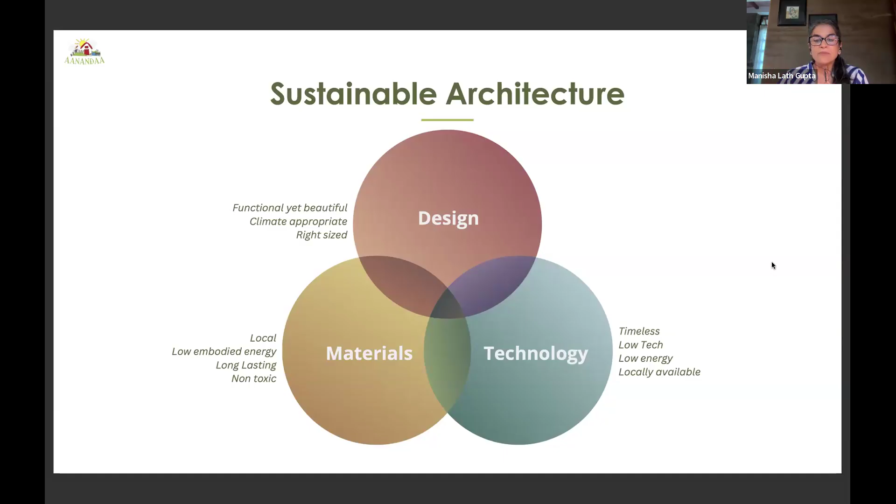The second thing is materials. We want to use as much local material as possible with low embodied energy, which have a long life and are non-toxic. And then technology was really the big debate. Okay, what kind of technology should we use? Even when you talk about earth architecture, there are many, many options. And we needed to figure out which one we wanted to go with. So let me talk you through each one of these in a little bit more detail.

Let's talk about the sustainable design piece of the puzzle. The important thing is really to design a house which is very appropriately sized. And in our case, we were very lucky that we had spent many years in Mumbai. And as many of you in Mumbai know, the house size is very small. So we never had this craze of building something so huge. And in fact, even after we started the project, I shaved off 500 or 600 square feet from the house design, even when we had begun construction at one end.

Because every place I used to ask the architect, "Bhai, yaha, who will clean up this place? Yaha, who will do the mopping, who will do the sweeping, and who will keep this place cool or hot?" So please think of the spaces as easy to cool, easy to heat, and easy to maintain. And don't get caught up with the impact of it.

And the other thing was, suppose you want to build for multiple people, there is always a way for you to have rooms which can be used for multiple functions. So while this house has 3 bedrooms, it can actually still host maybe 20 people, because many of our other spaces can double up as guest spaces if you just put mattresses on the floor.

They will still have privacy, they'll still have a room, they'll still have a bathroom they can use, because we have doubled them up for other uses.

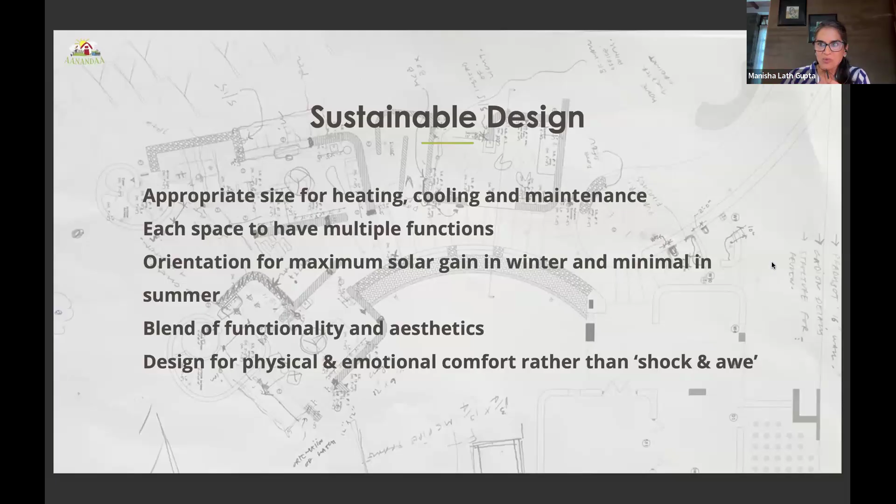So we were very clear, we live in a village anyways. We actually want a house which does not shock and awe. We want a house which nobody can see, which should be hidden, and it should look very modest. And that was really part of the brief that we gave to Jitesh.

The second question was what materials to use. So I was keen to use earth, because that's really the material that all of us who think of building sustainably use. So we wanted to use earth. We wanted to use materials which have low embodied energy, can be found locally, and they can assimilate back into the ground if this house is ever broken down after however many years of it being around. So that's how we looked at each and every material that we used.

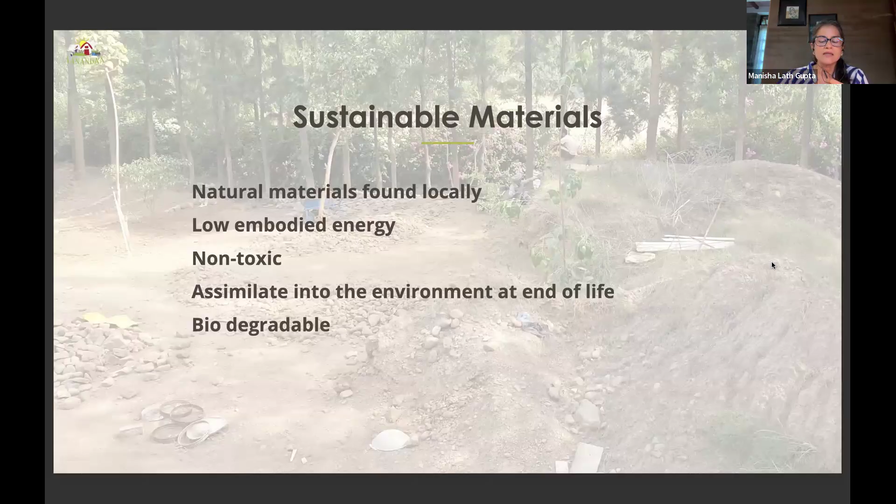And eventually we chose earth, lime, and stone. And I'll just talk a little bit more in detail about why we chose those 3 materials, and where we sourced them from. And the last thing was on technology.

Wherever possible, I was keen to use some very low level technology, because when you live in a village, you're always worried about maintenance or repairs or anything that you need to get done later. And if things are built simply, then simple people can repair them. But if they are built very fancily, then you need very fancy people to come and repair them. And that may not be possible in a village setting.

So ancient wisdom over modern science was our choice. Minimal repair or maintenance, whatever takes that, we will go with it. And managed by low skilled workers or even by ourselves. That was really our ask.

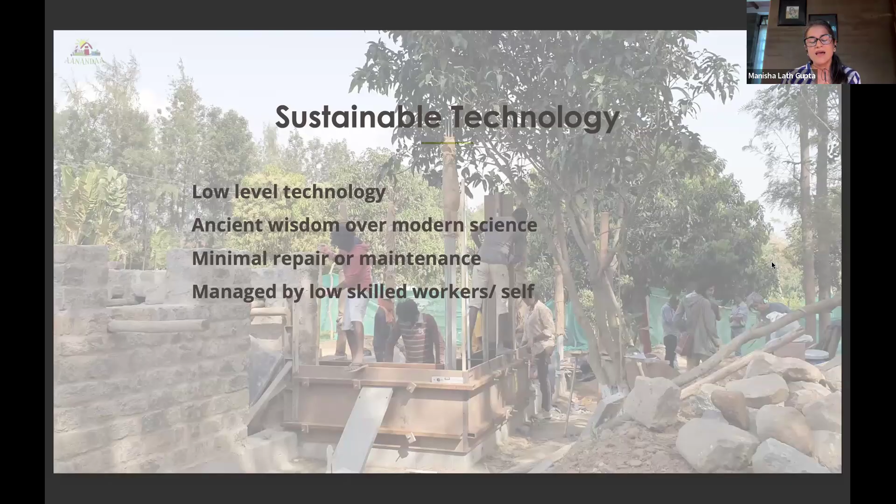So I had actually no idea about rammed earth. I had never heard of the concept before. I had seen a lot of daub and wattle. I had seen a lot of cob. I had never seen rammed earth. And Jitesh said, let's make the house in rammed earth, because it will look contemporary. It will look modern, and it does not have that rustic vernacular feel that some of the other technologies end up having.

Now, yes, I had the same thought that many of you have when you first look at rammed earth, and that was what happens when it rains? Won't it all just dissolve and disappear? So that was my reaction as well. But then I researched it, looked it up, and realized that it is a very commonly used material.

It has been used in the Great Wall of China. It has been used in Leh Ladakh quite a bit. Some of the buildings which withstood the Nepal earthquake were all made in rammed earth. It's a common material that's also used in some parts of the US, especially Santa Fe, I think quite commonly used there.

And the way rammed earth works is that because it's a thick wall made of earth, it is very good thermal mass. This basically means that if it acts as a partition, and there is cold air on one side and hot air on the other, the two sides will try to equalize the temperature. But because this is such good thermal mass, it will take a long time for this to equalize.

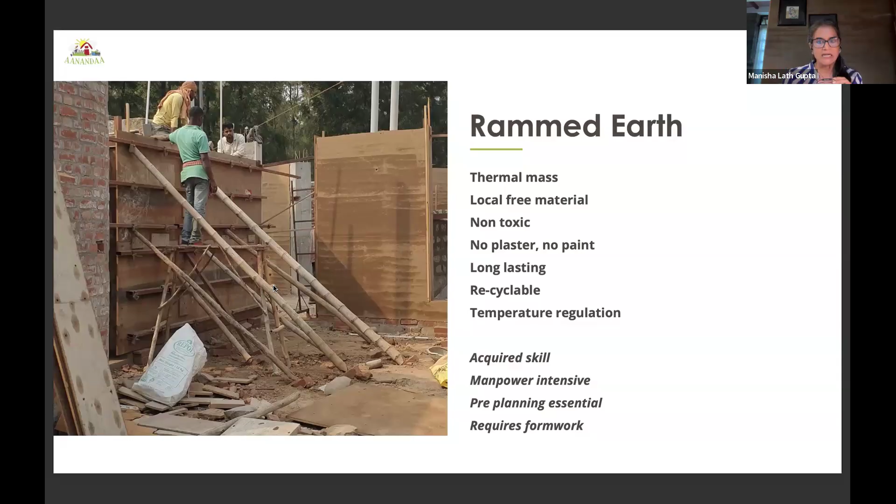The second material that we used was stone. And the reason being that we actually have a lot of stone in the village and around us. We are in the middle of a mining kind of an area, and there is a lot of legal mining which happens here, of course, some illegal as well. And stone is a readily available material and also good thermal mass, just like earth, and a lot of good local craftsmanship. So we were very keen to give as much employment to the local village as possible. And this was a good addition to our palette.

And in fact, Jitesh felt very happy adding stone because it gave relief from the heavy brown color of the rammed earth and gave a nice contrast. And also some walls which were slightly curved, which were not absolutely straight and therefore could not be rammed, we picked all those up in stone. So when you see the final house, you see that it's a really good combination of the two.

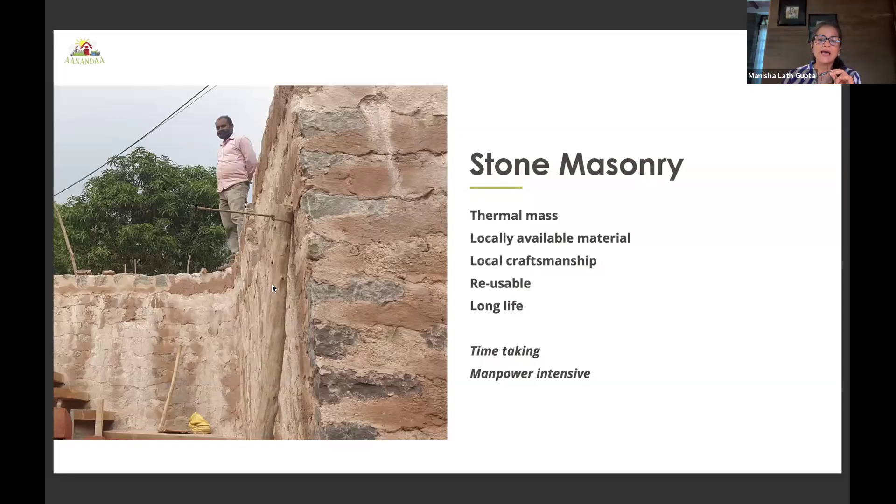And the third material really was lime. We wanted to use lime because one of the very good properties of lime is that it is a natural termite resistant material. And I was very loath to do a very toxic termite treatment in the foundation of the house because remember, for us the habitat is really important. It's something we'd spent 12 years of our life building. We didn't want to contaminate it or poison it in any way because it's not just us who live here. There are so many other species who live here as well. So that was a very big attraction. And of course, it's a natural material, it's recyclable, it's non-toxic, it's supposed to be long lasting. So that's the reason we chose lime in a lot of places.

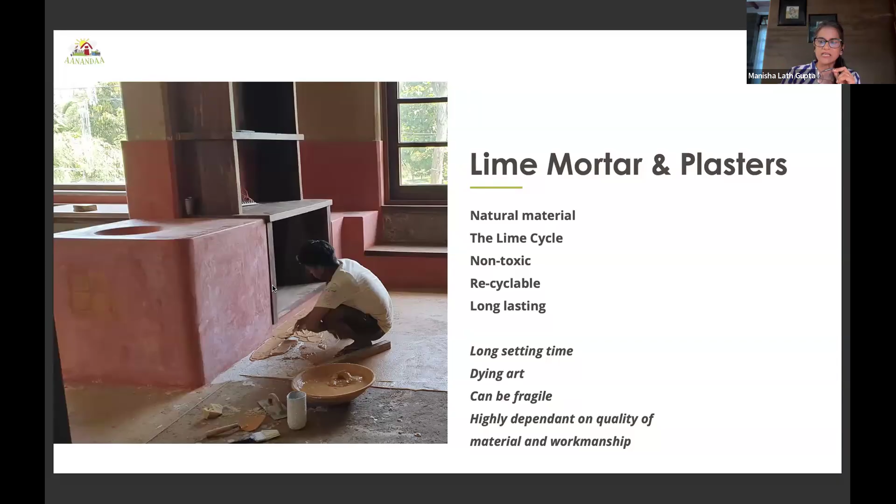And the downside really is that it takes a long setting time and you have to be careful about it, and you can't do some of the things that we've got used to doing now in our homes, like dragging beds and dragging heavy furniture, because it can be fragile. And it's highly dependent on the quality of both material and workmanship. And as you know, both of them are hard to find. And so this is where we took help from Malvika Mehta of M-Line, and we learned a lot from them. But I'll talk a little bit more about that as we move ahead.

Okay, so the walls and the floors were settled. Really, the discussion came to what should we do for roofing. And the problem with concrete roofs is that they become very hot and we don't have any air conditioning. So we had to really think through how to create a roof which will not heat up the house.

So concrete slabs, as you know, are the standard roof of choice these days, which is what most people use. It's a very hot mix of stone, cement, and steel, all of which heats up under the hot sun. And a lot of times, if you see old houses, the reason they have to be rebuilt is because the roof has caved in. It's not as if the walls have broken or the floor has broken.

No, it's always the roof, because the steel mesh that is put inside these slabs tends to rust over time. And once it starts rusting, it can't support the weight anymore. And then what do you do with this concrete? You have to go and junk it somewhere, because the mix is non-recyclable. Once it's mixed up and set, it's just that. So we didn't want to really go ahead with a concrete roof.

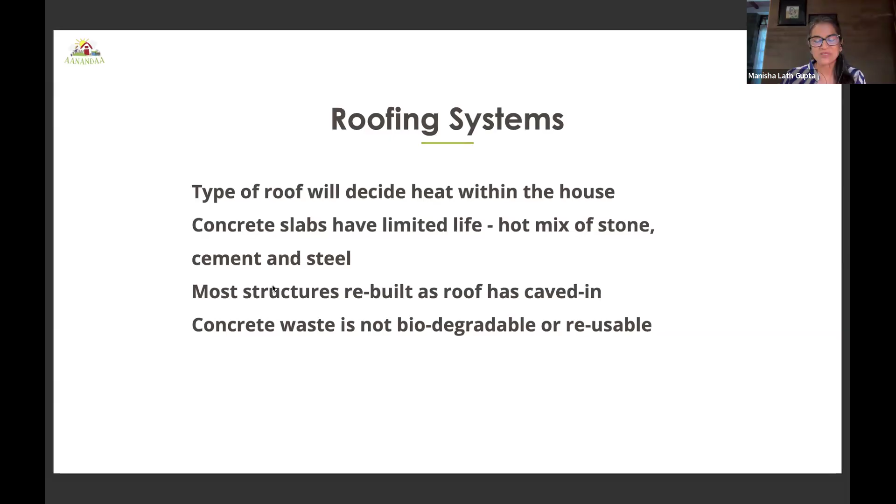That will give us an idea of the pros and cons of each one, and we can also share with other people. And a lot of these risks I wanted to take, because I was like, listen, if I take the risks, maybe somebody else will also be willing to take these risks. So we decided to actually go with all different types of roofing systems in different places.

And they ranged from shallow domes, which you can see here in the drone shot, built purely from brick and cement. It has no steel and it has no shuttering. And these gentlemen that you can see standing around the dome are from the Rohtak Dome family. They're very well known. You can find them on Google as well. And it's just amazing how they make these roofs. And this is traditional technology we have in our country, which for some reason we have chosen not to follow up with.

And then the kitchen roof was one of the first roofs we built, and we had just started the house. We had to place the water tank. And so we were already a little confused as to which roof can take the load of the water tank. And we started thinking, oh my God, will we have to put a concrete roof right at the beginning of the project? Because that would really defeat the whole idea of trying to build a little more sustainably.

And so we settled for the filler slab, which, as you know, is a relatively more popular technique of putting some earthen pots in the roof and thereby reducing your concrete consumption. And in fact, I've noticed that it also keeps the roof much cooler, because wherever there is a pot, it doesn't heat up that much. So I have a temperature gun. I go around measuring all surfaces in the summer, and that's how I know which roof is working how.

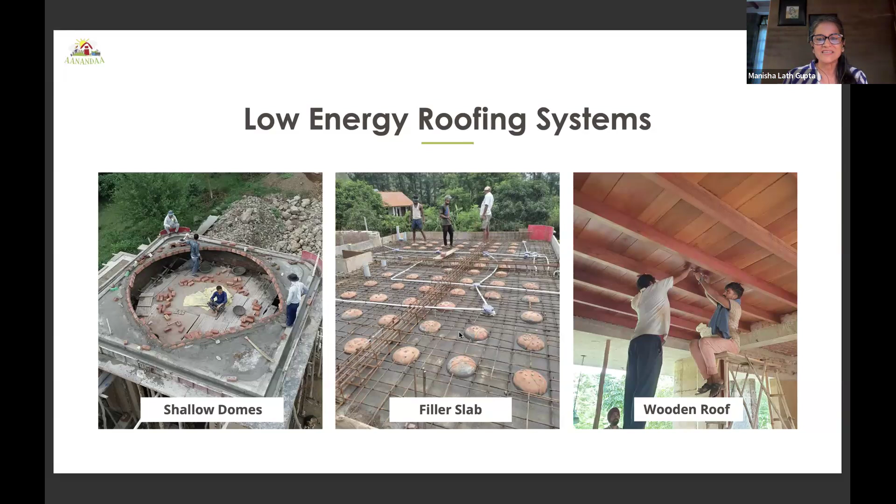So those are the 3 roofs, and we added a few more, which you will find details of on my YouTube channel. But here is a nice picture of a shallow dome under construction. This dome actually has a riser of only about 9 to 10 inches, so you can easily put another floor on top of it. And it has no steel, no shuttering. The minute these guys make it, people start standing on these roofs, and they can take the weight. And don't ask us how it works, but it's pure magic and it works pretty well.

So it's very affordable, very cheap, and very quick to make. In a room size of about 12 to 16 feet, it would take them 2 days to make this roof. So really, really good craftsmanship. And I think everybody can choose to integrate roofs like this into their projects.

Now let's come to finishing materials. Lately I've been thinking about how toxic and inflammable finishing materials used these days by interior decorators and homeowners are, because whenever there's a fire, and unfortunately this summer's been so hot, and we've seen some horrible fires happen in India, some in Delhi, and some other places as well. And a lot of times people are dying not because they got burnt, but they just got asphyxiated because the nature of the poisonous gases emerging from this fire was just unbearable for them.

And this is all coming from the highly toxic and highly inflammable finishing materials that are being used by interior decorators within our homes. As a homeowner, and of course as a designer and an architect, I would really urge everybody to look at the materials very, very carefully before they are integrated into a living space. Because at the end of it, we all have to live in a non-toxic environment. That's the whole charm of having a sustainable house.

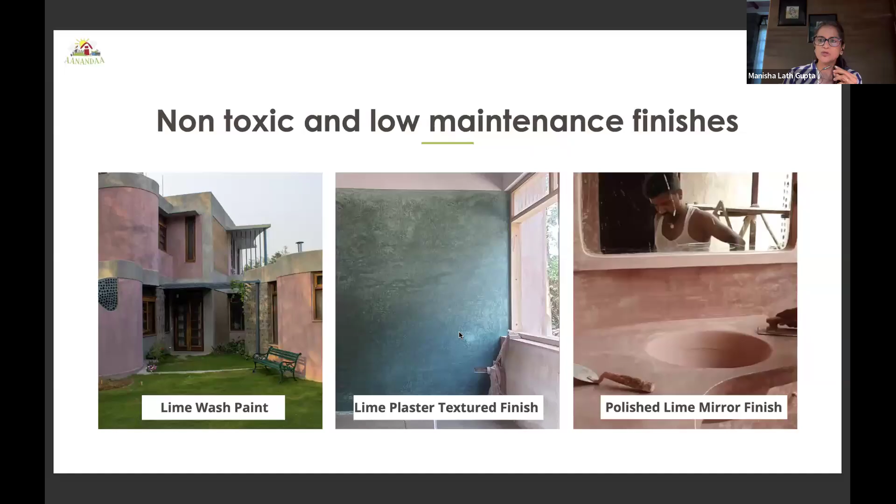And then in the bathrooms, we've used polished lime, which is a mirror finish kind of experience. This again has a classic, everlasting kind of feel to it. And we've avoided the use of tiles and things like that in our bathing spaces. This is a nice photograph of the bathroom. And then the outdoor shower that's been thrown in here, because what's the point of living on a farm if you cannot have an open to sky shower in the warm summers?

All right, let's talk about water, guys. It's the most important thing, something that we literally run our entire house and life on.

And I was very clear that we want to harvest all the water that's falling on our rooftop, and I want the house to run on rainwater. So a simple calculation told me that I receive 150,000 liters of rainwater on my rooftop. And those of you looking for this quick calculation and how do you arrive at it? Well, the formula is take the roof of your house in square meters, multiplied by the average annual rainfall in millimeters, and you will get the volume of water in liters.

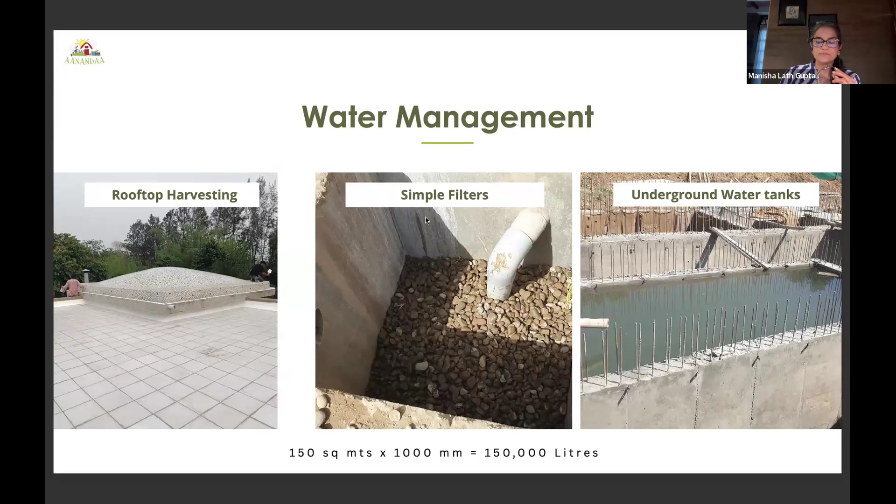In terms of waste management, all the wastewater from our house, all the gray water, so showers, kitchen, wash basins, they all go into the garden. So all this water is managed in small beds outside the house and very close to each of the outlets. So we are not aggregating this water, we are keeping it separate and just putting them into very biologically rich

and active pits. Usually around these pits, we have either papayas growing or bananas growing, lemongrass growing, and all the water that comes out of our wash basins and our showers comes out here, including washing machine, by the way. And we have just shifted to using cleaners which are non-toxic. It's just a simple thing we could do. And today there are so many artisanal brands. They're doing such good work, and we just buy our products from them and use that.

And so we've realized what's not good for our garden is not good for us. So we don't want to use any product which is harmful for the soil life. And in that process, we ourselves have become much healthier as well. And where black water is concerned, which is basically human poop, we've installed a biodigester. So that green box you see here is a biodigester bedded into the ground.

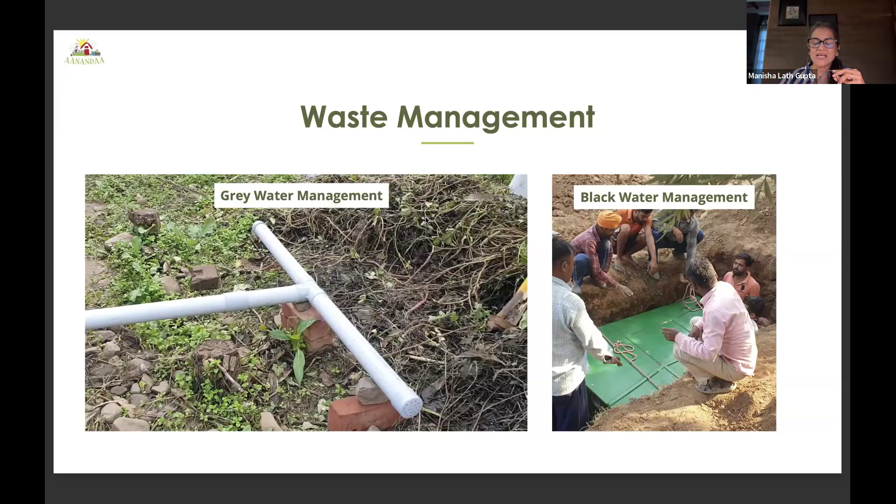All the waste from our toilets comes into this biodigester, and this biodigester has anaerobic bacteria in it, which feasts on human waste. So as it breaks down the human waste, it releases a small stream of liquid, which we channelize back into our garden through a soak pit. So very simple, all the waste is managed in our garden itself. And yeah, I mean, it really keeps our moral compass absolutely straight. We know exactly what to use and what not to use, seeing that the water goes straight into our gardens.

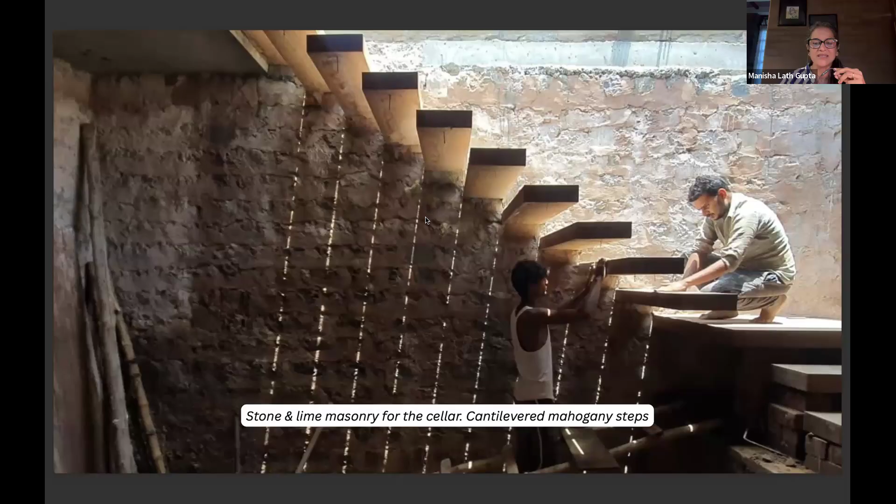Okay, this visual is of our cellar, and this is while it was still under construction and we didn't have a roof, and you can see the beautiful light coming in through. But let me just talk a little bit about the cellar here. So a cellar is basically a place which is underground. And what we've done here is we've just dug like a basement and built a space which has very thick walls, almost 4 feet wide at the bottom and about 3 feet wide at the top. These are made of stone and lime.

And this is the place where we store all our food. So we need a cellar because we grow food. We grow a lot of food. You may not need one. But if you do decide to build one, just make sure that you are in a very well draining place, because if there's a lot of water accumulating around your cellar, you will have problems of dampness and also some seepage.

So our soil type itself is sandy. Our house is on an elevation. Water does not gather here. It leaves the surroundings pretty fast. And all those reasons prompted us and made it suitable for us to create a cellar. It may not be in your case. So I would urge you to not just follow this blindly, but see if it works for you or not.

Now, there are three things that are important in a cellar. You have to keep the air circulating, you have to maintain a temperature, and you have to maintain a certain amount of humidity. So the air circulating is done by simple exhaust fans, which run 24/7. They don't take up too much energy, and they basically draw fresh air coming in from the outside into the cellar.

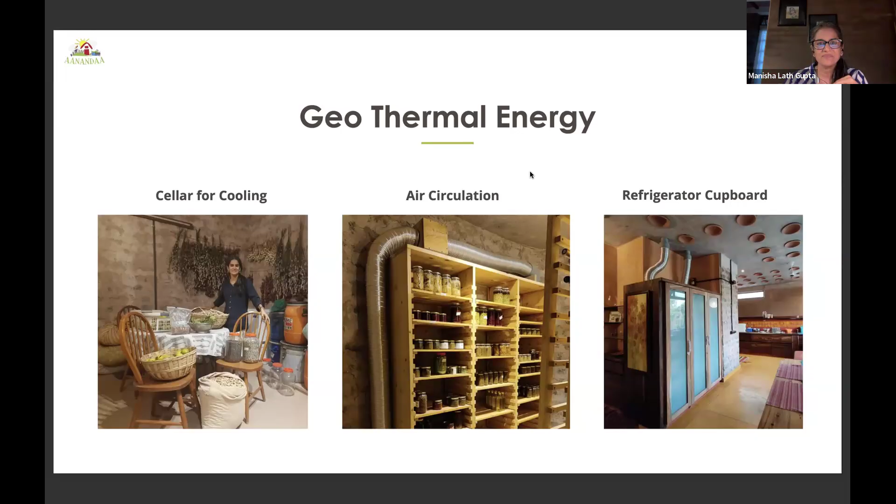Wherever possible, we've used very simple energy systems. I think maybe because this house was made by a woman and not a man, there isn't that much masculinity built into it. So there is no fancy tech and high energy. We have simple solar panels. We have a 10 kilowatt plant on our rooftop, and our house runs on that. And in fact, we consume much less than that. We give some surplus to the government.

Whenever we find that the heat is streaming in from some window and heating up our house, we plant a tree outside it. And I have used this frangipani tree as a tree of choice in some places because it is deciduous. It drops its leaves in the winter, allowing the sun to come in. And it stays green in the summer, blocking the heat. Not to mention the beautiful flowers on it, which are very sweet smelling, and you get a free, non-toxic room freshener effect as well, right?

And then for winters, we heat up our rooms with a simple fire stove. And because we've planted so many trees and we have so much spare firewood all around us, this again comes at a very low cost to us. The ash, by the way, from here is very useful for our plants, and it finds its way back into our flower beds.

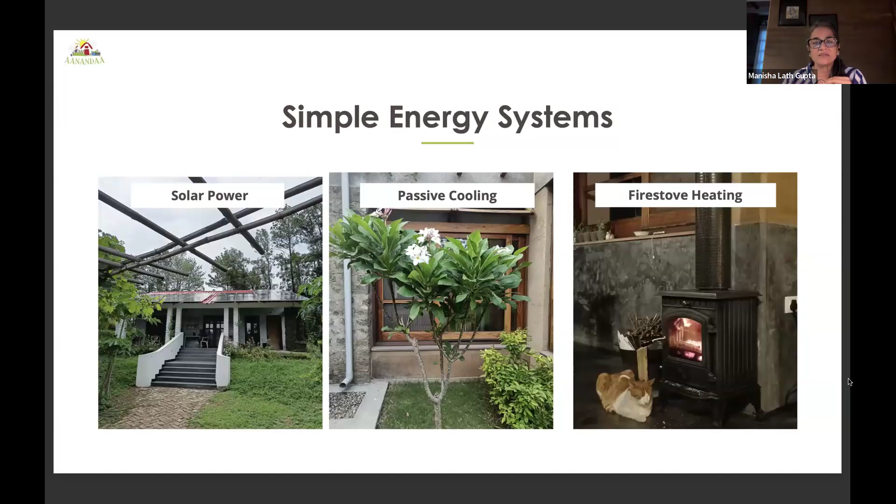A simple thing that each one of us can do is use salvaged and secondhand furniture. In fact, sometimes it amazes me how people build a new house and they change everything in it, no memories, no old furniture, no nothing. But I love old things, and I've tried to not only hold on to my old things, but also a friend's old furniture.

So we've spent money on labor to fix them, but that's always been something of choice, that if we have to spend money somewhere, we will spend it on people, put it into pockets of artisans and masons rather than into the pockets of corporations.

Okay, low-tech fixtures. Again, I've already showed you some of these pictures, but wherever possible, we even made our own light fittings because I wanted fittings which have replaceable bulbs. And unfortunately, a lot of the light fittings that we get these days are these Chinese fittings, which when they stop working, you have to trash the whole fitting altogether.

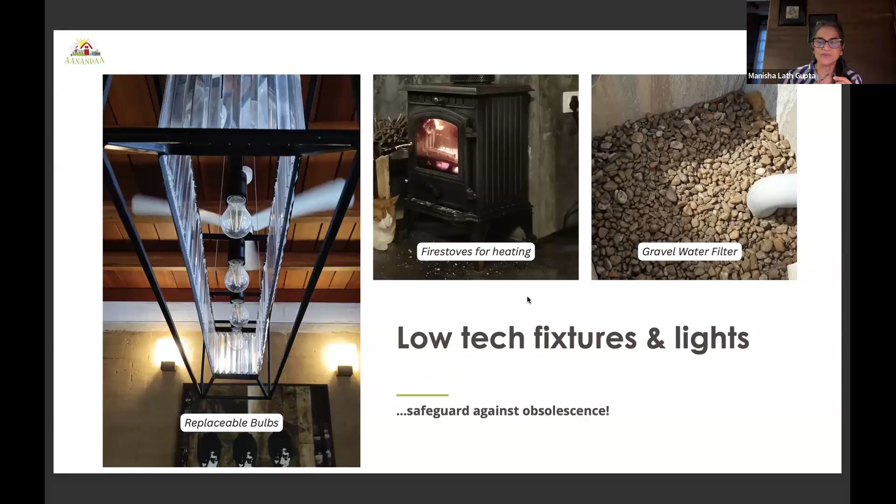But we had a lot of little leftover wood from the woodwork, and we used those pieces to make these light fittings, which were actually designed by our architect. And this worked really well for us. And you've already seen the fire stoves and the gravel water filter, which are again very low-tech fixtures, and they help guard against obsolescence.

Okay, one of the other principles that we try to follow was produce no waste. And I had a deal with Jitesh that we will not break anything that we've already made. So if it is wrong, too bad. It should have been supervised better, or the plans should have been better. So we've not broken anything we already built.

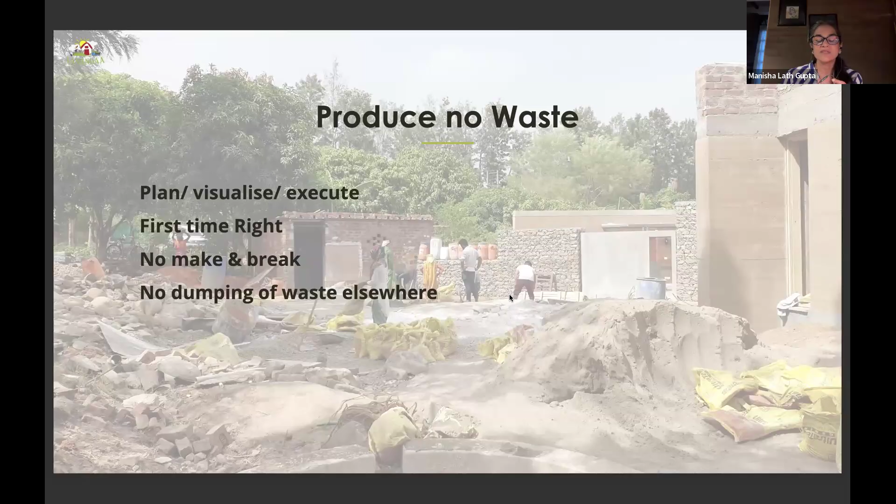We've tried to get as many things first time right, and we did not want to dump our waste from our construction anywhere else. So what we did was, at the end of our construction, you can see this construction site. It was filled with all sorts of waste. And we built this retaining wall, which you can see in the backdrop, and picked up all the waste and chucked it behind it. And that raised the level of that area. And then finally, we planted trees on top of it and settled it all.

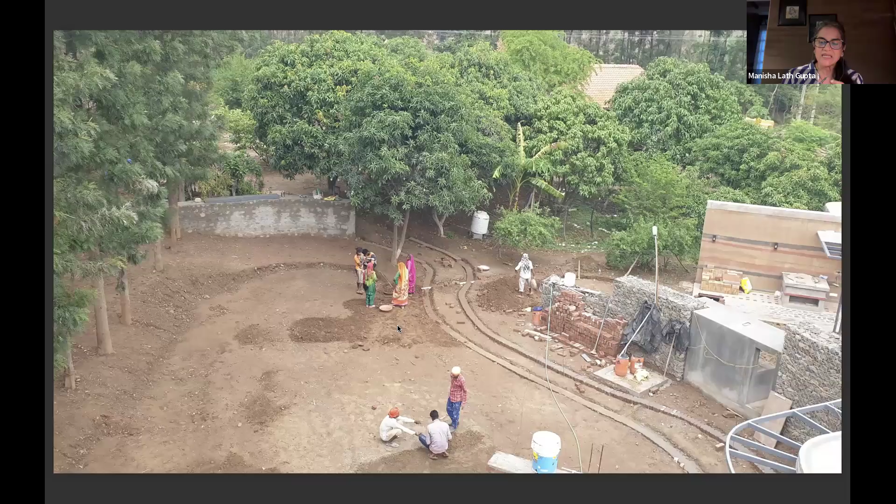So we've buried all our waste right here on site. But we were very careful of not going and polluting somebody else's land and dumping waste anywhere else. And that should really be an integral part, I think, of our construction ethics if we are trying to build sustainably.

This is another example of how we've reused something. Right at the beginning of the project, I was told that we'll have to build a slaking tank, a lime slaking tank, a tank in which we will put the lime and hydrate it so that we can use it. And I was like, boss, you can make any tank you want, but we're not going to break anything. So just make sure that that tank has a life at the end of its utility.

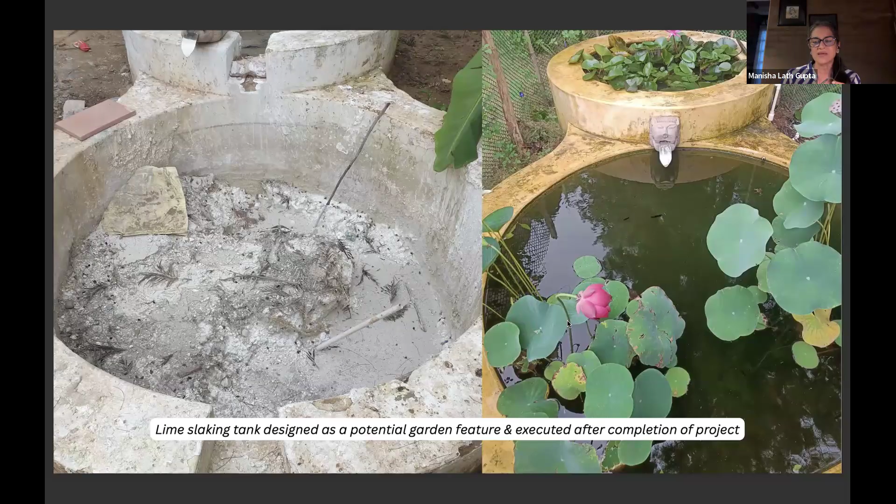And so in that process, it was designed to start with as a garden feature. So in fact, it was strange for us to build such a nice looking tank right at the beginning, but that's what we did, built this tank. And then you can see today, it's something that is actually a big attraction point for us, especially in this season, because there are a lot of water lilies and lotus that grow there. And now it's inhabited by a bunch of fish as well. So if you just think well in advance, I think you can really solve for a lot of problems.

All right, very quickly now, how do we get this project done? And listen, it's not easy. And if you're a homeowner, you will have to get involved yourself. Please don't think that this is a house that somebody else will build for you and hand it over to you on a platter. Some of the things that really worked for us was to have a regular cadence of all hands. And this is my corporate experience coming to play, where every head or every contractor, the plumbing contractor, electrician contractor, masonry, carpentry, all of them would come together once in 2 weeks, and we would make the 4 week rolling plan of what will be done next.

We would anticipate bottlenecks, dependencies. We would put a lot of rigor in BOQ estimations, and we would book time of some craftsmen in advance, especially like the Rohtak Dome people. They travel around the country building homes for people. And so if you don't slot them in a few months in advance, they're not going to show up to do your work. And then schedule work which might take long time, like lime floors, lime plasters, for example. You have to schedule it early into the mix so that you can still do it and yet you are on track. And I don't think I mentioned, but we built this house in 20 months, which is not bad at all. I'm pretty sure any kind of a house I'd set out to build would have taken that much time.

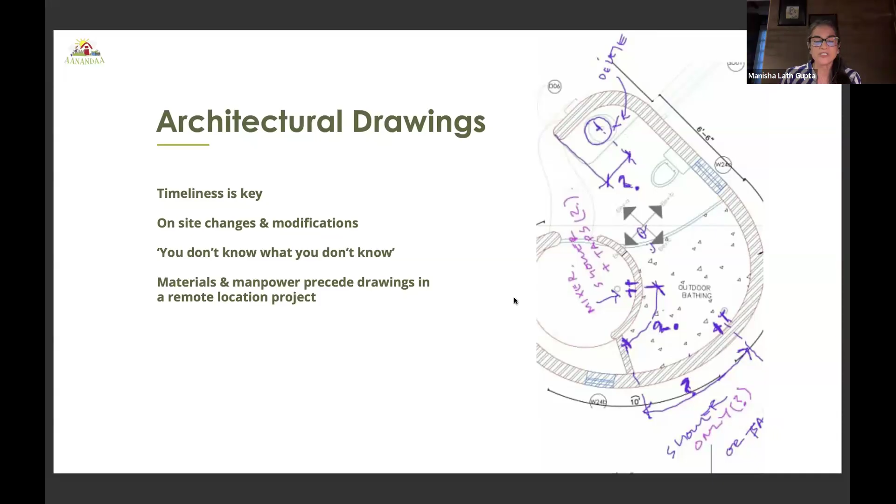Where architectural drawings are concerned, and to those architects who are on this call, see, timeliness is absolutely key. But you will also see that in houses like these, sometimes you don't know what you don't know. In our case, that was very common because we were doing so many things for the first time that neither Jitesh had done them. I had never built any house earlier, anyways. But even some of the masons and all had never built anything like this. So a lot of times we had to literally work off sketches, and you can see here conversations happening on WhatsApp, move this around, take this around. But that kind of presence and adaptability is required when you're building a house which is not the norm, which is not something that everybody is building all the time.

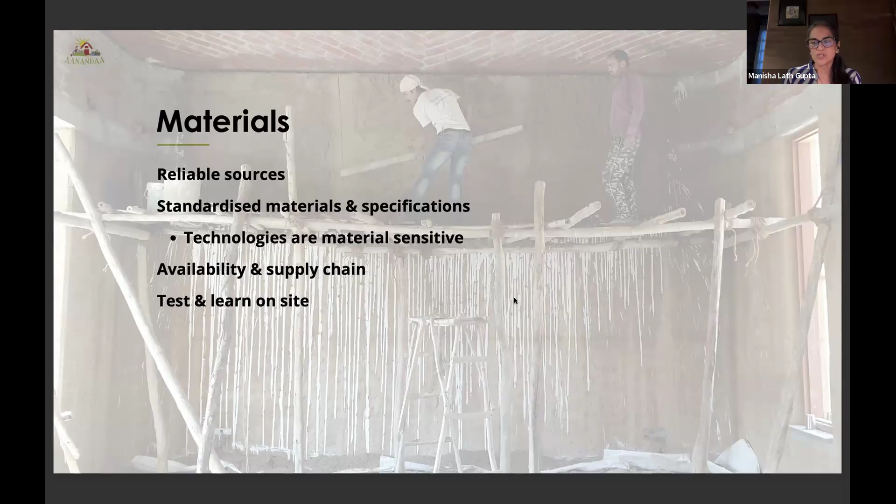In terms of materials, while we all want to work with natural materials, they are not as standardized as some of our packaged materials. Like a bag of cement is a bag of cement, but a batch of lime is not a batch of lime. So you have to really identify some reliable sources, then standardize these materials and specifications, and you have to test and learn on site quite a bit. A lot of times people ask me on my YouTube videos, what's the mix ratio? Please tell us. It doesn't help my telling you what the mix ratio is, because honestly, I don't know what your lime is. I don't know what quality of sand you are using, what quality of brick powder you have. So it's very misleading to just take somebody's ratio and work with it. You have to test and learn and build your own ratios.

But we have still gone ahead and worked with artisans. I mean, that's the best thing you can do with your money, is to put money into needy individual pockets. And I think, unlike these cookie cutter houses, there is a certain soul that you will find in sustainable structures, and the energy of the craftsmen actually gets embedded into the walls. At least that's what I believe.

So it's very, very important to keep the team motivated, happy, positive, treat them with respect. I mean, I always feel I'm indebted to them for life because they have built my house. And actually it's a skill which none of us, at least I don't know how to build. So it's strange that some of these jobs which are so important are not as well paying as some of the other jobs which are not half as useful or important. But I think it's important for us to respect them because they're building a house for you.